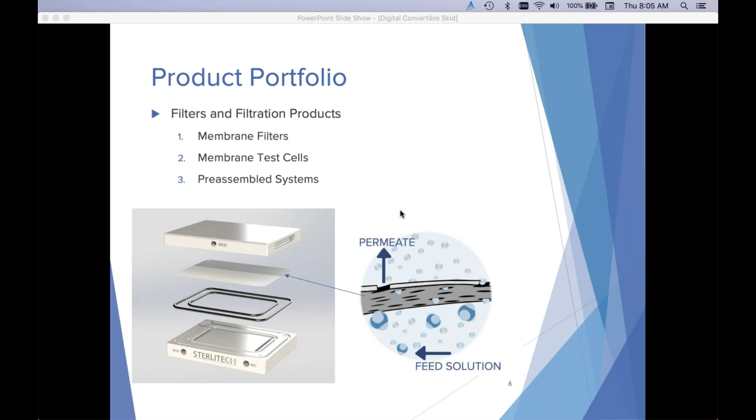What do we offer? Sterlitech mainly offers filters and filtration products. We offer membrane filters, both organic and inorganic membranes, and we offer membrane test cells that you will use to test those membrane filters. We also offer fully assembled systems that have those membrane test cells in them. What you see on this slide is one of our test cells, which is a cross-flow cell that accepts polymeric flat sheet membranes, and its feed solution will be circulated on one side and permeation occurs through the membrane.

We have different types of test cells. What you see on this slide is all the different cells that we offer. The first one on the left is called Discoverer, and it's a stirred cell, dead end type of cell, with only about 300 milliliters capacity on the feed side, and the membrane area is only about 14 square centimeters.

Going through Innovator, Explorer, Developer, those are cross-flow type cells, so feed will be circulated on one side tangential to the membrane surface, and then permeate gets collected on one side. The difference is the membrane area, and as you can see, CF016, the Innovator family, has the smallest area and Developer has the largest area. These are all available in different materials of construction, so they can be stainless steel, Delrin, etc.

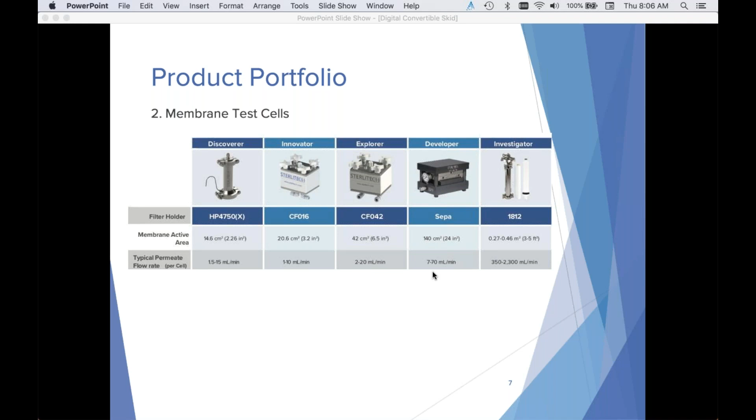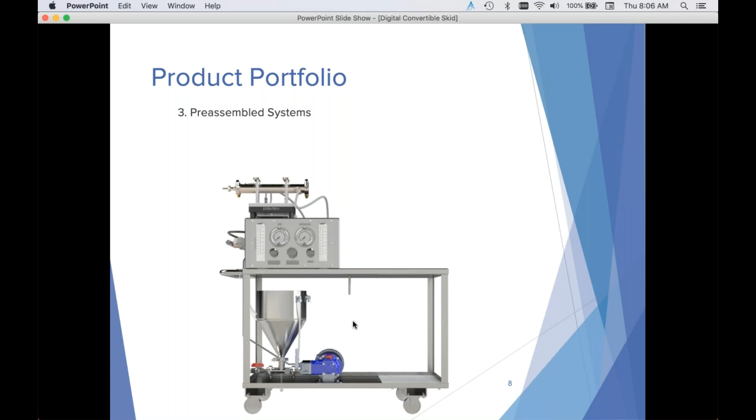And finally, the largest test cells that we offer are 1812 and 2540, and those are spiral wound membrane elements and housings, and you can see the membrane area is significantly larger. And finally, we offer pre-assembled systems. These systems, as you can see on this slide, have those test cells installed on them already. So this is like a plug and play kind of system. When you receive the system, you just plug it in and test your membranes in them. And this is basically what we're going to present to you today.

So what are the main features or benefits of these systems? One of the main features is that these systems have been fully assembled and tested here, and researchers can just plug and play and test their membranes in them, instead of spending time on sourcing pumps and fittings and all the other sensors and features that they need to build a full filtration setup or filtration rig.

These are highly customizable for chemical compatibility, so we can change the material of construction based on your application. And we can also integrate pre-filtration or post-filtration systems, before and after the test cells that we offer. And finally, these are modular systems, and you can add or remove test cells to the same system while you keep the same feed tank and pumps and sensors and everything. These are also available in both 110 and 230 volts, so they can be used globally.

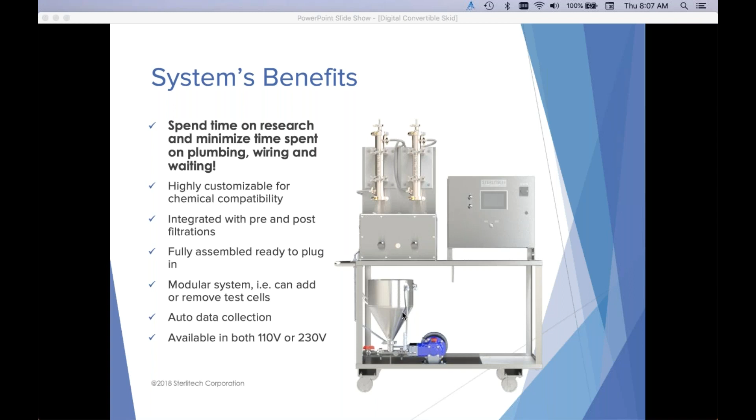What are these systems used for? What do researchers use these systems for? These systems can be used for a variety of different applications: processing water and wastewater, food and beverage applications, chemicals treatment, pharmaceutical, or even treating radioactive waste.

As you have noticed, since we started talking about these skids, I've shown you a few different kinds of designs for these systems. The one on this slide is a system designed with pre and post filters, and they have Sterlitech test cells on them. This is an analog system, and Sarah is going to present to you more features and system components on these kinds of systems.

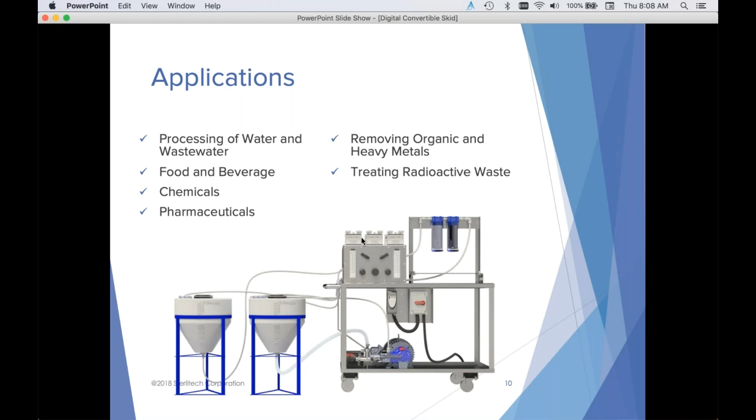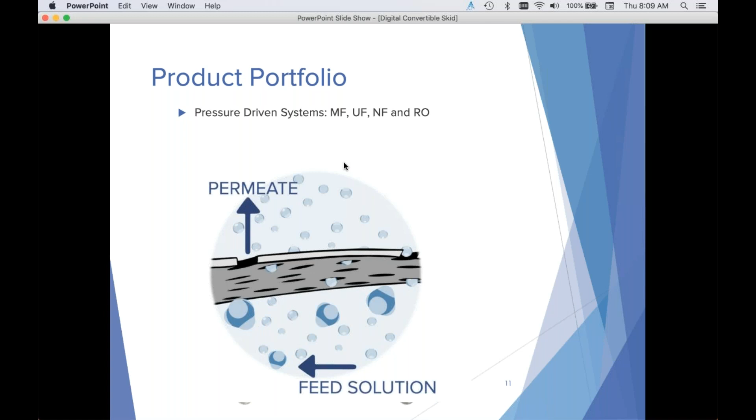These pre-assembled systems can be designed in a pressure-driven mode. What that means is that there is a pump to pressurize the feed side. Feed solution is circulated tangential to your membrane, and then permeate goes through the membrane and gets collected. This is a typical system design for a pressure-driven filtration system with a pump to pressurize the feed side. And on this one, you have a 2540 housing, which is a cross-flow system, and then you collect permeate.

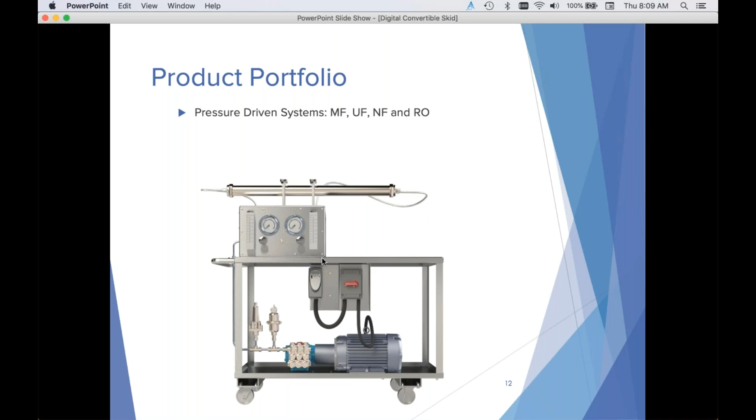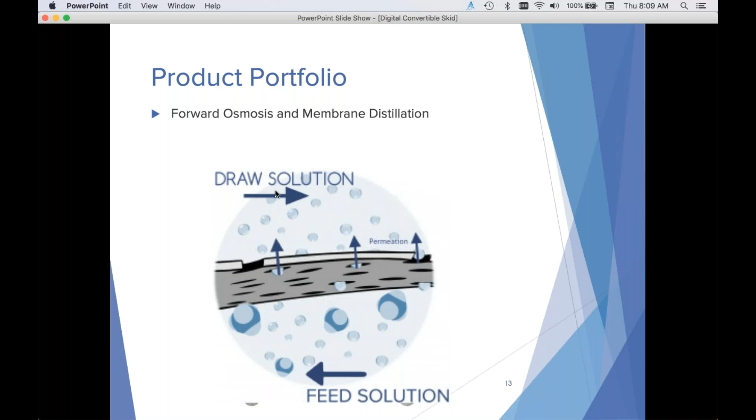The other alternative is to use these systems for low pressure applications such as forward osmosis or membrane distillation. The main difference is in addition to low pressure, you actually have two streams or two solutions circulated in the system. You have feed solution circulated on one side of the membrane, and you have draw solution or cold solution circulated on the other side of the membrane. And then you have permeation through the membrane.

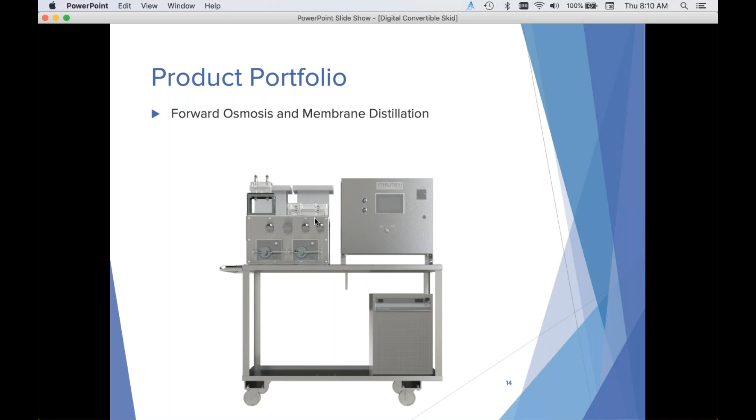As you can see when you look at the system, the main difference is you have two pumps, and you have two low pressure pumps because you don't need high pressure in these systems. The particular system on the screen is designed with two acrylic cells, as I was showing when we started the presentation, a smaller one and a larger one, both cross-flow versions.

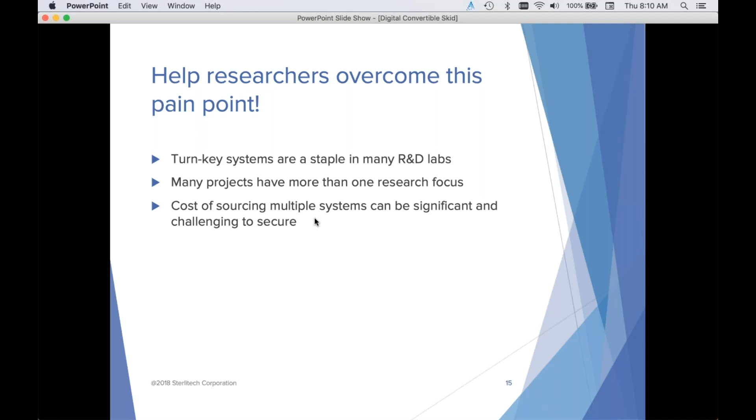These systems are one of the main components in any research lab, and they are used for different types of applications. However, let's say you start with one type of system, and over the years your research focus changes, and you need a system with maybe two pumps now. But the cost of sourcing multiple systems can be significant and challenging to secure, especially in academia. So how about one pre-assembled system that can do both high pressure or low pressure kinds of filtration? So with that, I hand this over to Sarah to present to you more about our pre-assembled systems.

Hello, everyone, again. I would like to take it over from Sepa from here and respond to the question of how about one system can do both. Yes, there is a system that we call a convertible system, and that system is designed to operate in pressure-driven modes such as microfiltration, ultrafiltration, nanofiltration, and reverse osmosis. And also it can be used in an osmotically driven or temperature-driven mode. If we look at the flow diagram of the system when it is operated in pressure-driven mode, like in

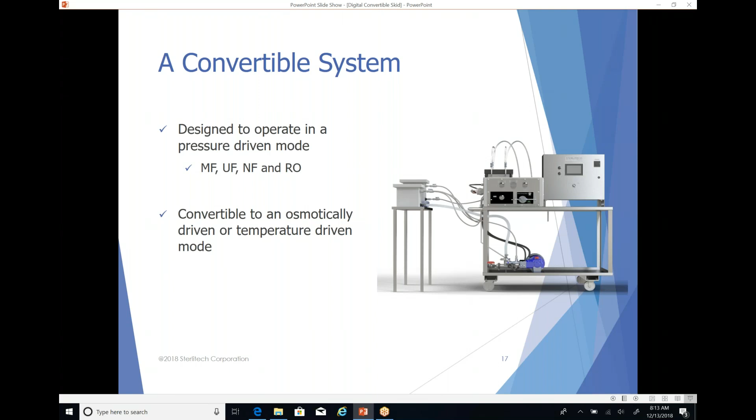So I will start from taking over the question from Sepide, how about one system can do both? And the answer to this question is yes. We have a convertible system that can be used to operate in a pressure-driven mode, such as microfiltration, ultrafiltration, nanofiltration, and reverse osmosis. And also it can be used in an osmotically driven or temperature-driven mode.

If you look at the flow diagram of the system when it is operated in pressure-driven mode, like in any pressure-driven membrane process, a pump is required to send the pressurized fluid to the membrane cell or membrane module. The pressurized fluid gets in contact with the membrane filter, and the water and the particles that have a size smaller than the membrane pore size can pass through the membrane, and the larger particles stay in the feed stream. So the concentrated feed stream can either exit the system, or it can go back to the feed solution tank to be recirculated in the system.

Depending on the type of application, the concentrated feed can be the final product, such as in fruit juice concentration, or the permeate can be the final product, such as in water treatment applications. The system also has a set of valves to control the pressure, and also pressure and flow sensors to monitor those parameters.

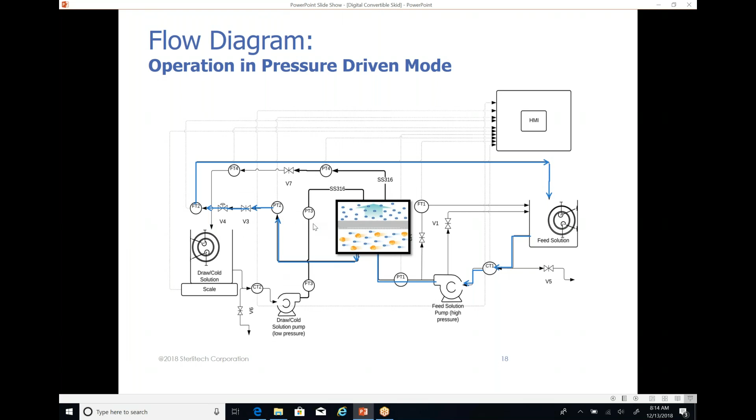If you look at the system when it is operated in forward osmosis or membrane distillation mode, in these modes two streams of fluid are required. So there are two pumps involved. One pump is circulating the feed over the membrane, and the other pump will circulate the draw solution or the cold stream over the other side of the membrane.

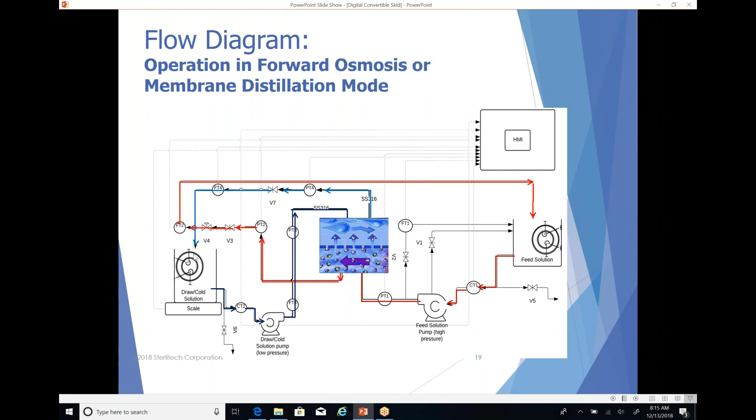In this particular schematic here, there is membrane distillation. The hot water stream passes over one side of the membrane, and the water vapor permeates through the membrane and gets condensed on the other side of the membrane. It will be mixed with the cold stream, and then it will go back to the cold solution tank. That's why the weight of the cold solution tank will increase over time, because the water is permeating through the membrane.

Now that we talked about the system flow diagram, I would like to introduce the components of the system and the features of each component. The main component of the system is a high pressure pump, and this pump can go up to 1000 psi, and this is a positive displacement type of pump. So the flow never drops at high pressure.

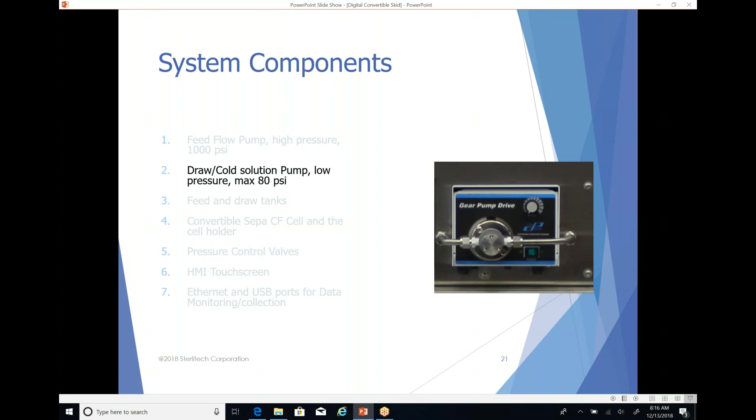And the system also has another pump, which is a low pressure pump, and the reason it's a low pressure pump is that for forward osmosis application or membrane distillation application, there is no pressure required, and this pump is much smaller, and also it's a low-cost pump that can be used for the forward osmosis application, and this pump can go only up to 80 psi. The other components of the system are feed and draw tanks.

This particular picture is showing the flat bottom type of the feed and draw tanks, and also there is a scale under the draw tank that can be used to measure the weight change of the draw tank, and then the membrane flux can be calculated using those numbers.

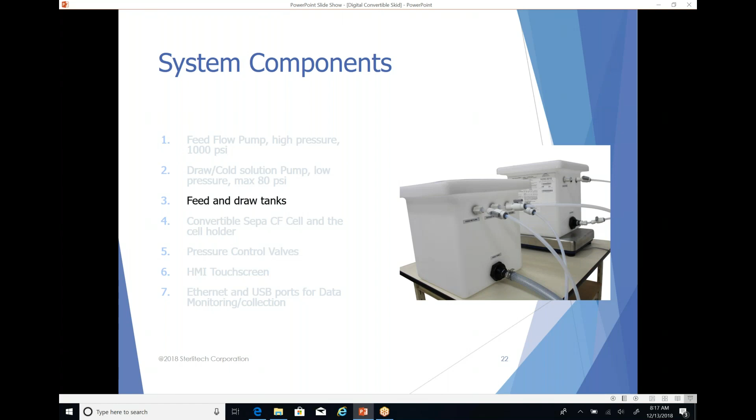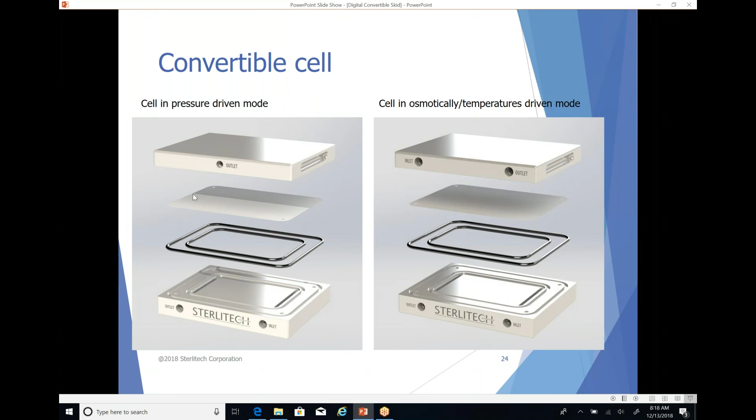And the second picture here shows the cell when it is used in osmotically or temperature-driven mode. If you see, the bottom part is exactly the same, so it's one inlet and outlet for the feed, but the top part has two ports, one for the draw solution inlet and the other port is for the draw solution outlet. And the cell can be easily converted from one type to another just by simply swapping the top parts. So that's very easy and straightforward.

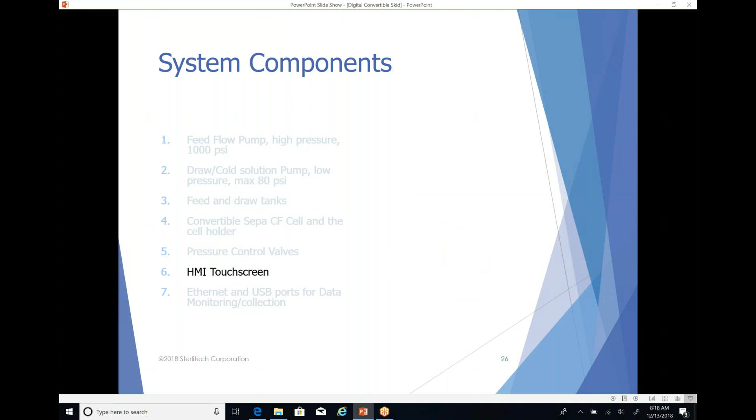The other components of the system are pressure control valves. So the system has a set of valves that are used to control the pressure in the system. Also, on the digital system, we have a human-machine interface touchscreen, and this touchscreen can be used to control the pump speed and also turn off or turn on the pump. Also, this touchscreen can be used to monitor the real-time data such as the fluid conductivity, temperature, pH, and also the pressure in the system.

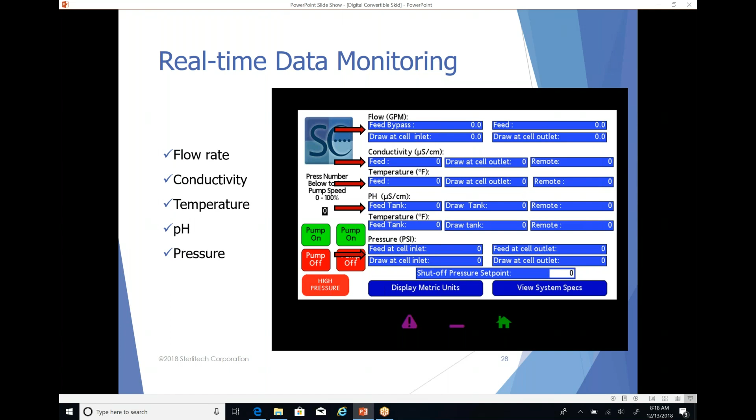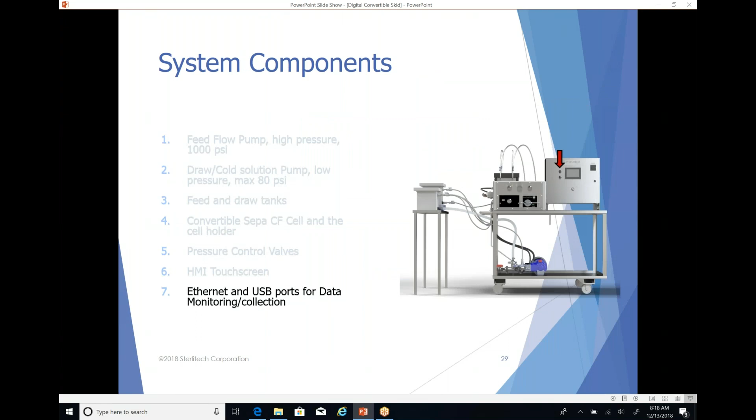The other components of the digital system are Ethernet and USB ports for data collection and monitoring. So the system has two ports, one for a USB connection and the other one for laptop connection. That USB port can be used to connect a USB memory stick, and the data can be easily transferred to the USB memory stick. This feature is very interesting, particularly when the system is installed in a remote or hard to access area, so that the user doesn't have to take a laptop each time to collect the data.

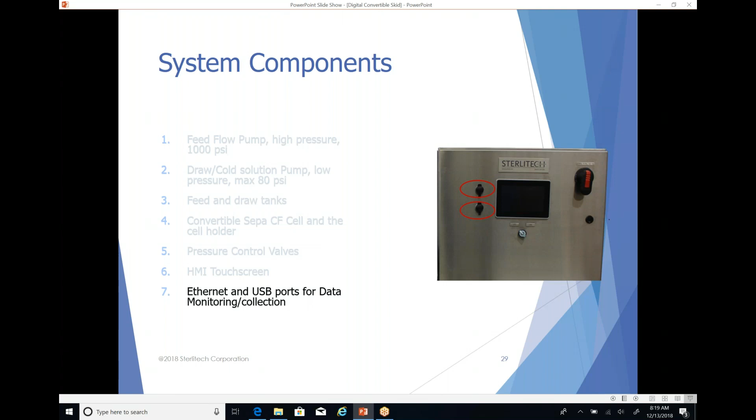And there is another way to collect and monitor the data, and it is to connect the laptop to the panel. So when the laptop gets connected to the panel, a page will be shown on the laptop that has two options for the user. If the user clicks on the view logs, it will take the user to another page where the user is able to monitor and also save the data that has been recorded in the system on the computer.

And if the user clicks on the remote view, they will be able to see the HMI touchscreen on the laptop screen, and they will be able to control the system, such as changing the pump speed or turning on or turning off the pump, and also will be able to monitor the real-time data on the laptop screen.

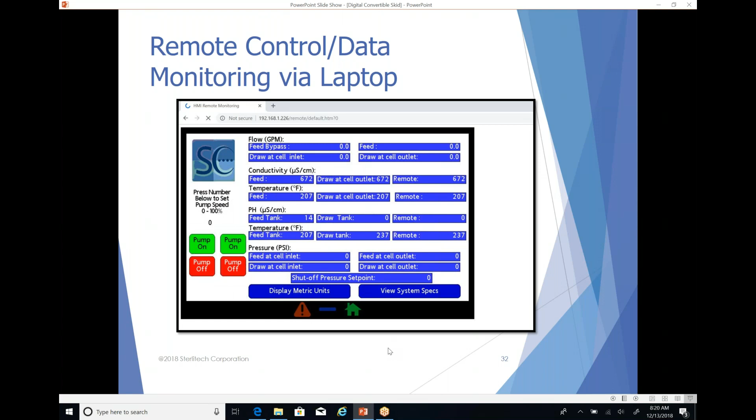We also have added some safety features to the system. One of them is a pressure relief valve. So if the pressure exceeds the pressure relief valve set point, the relief valve diverts some of the fluid back to the feed tank, and it prevents overpressure in the system. Also, on the digital system, we have a pump shut-off pressure set point, and whenever the pressure goes above that set point, the pump will automatically be stopped.

And these two features are very useful in protecting the membrane or the membrane cell, and also the sensors in the system from being damaged by overpressure. Another safety feature that we have added to the system is the level switch. As soon as there is no fluid in the feed tank, the level switch stops the pump automatically, and it doesn't let the pump run dry.

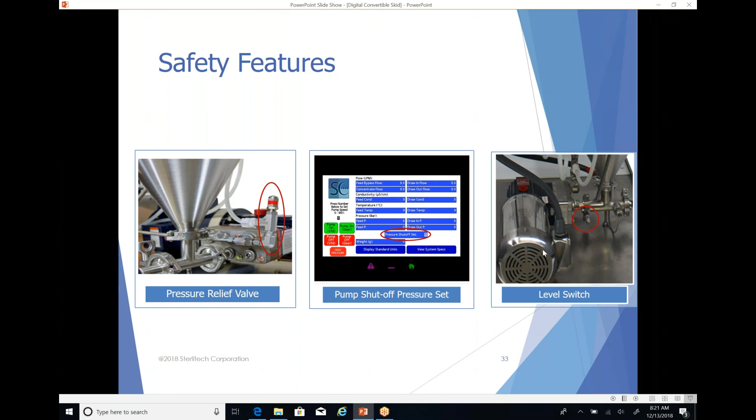To wrap up, the system can be used in very different applications, such as fruit juice clarification, milk purification, or whey protein concentration, and also wastewater treatment and water desalination.